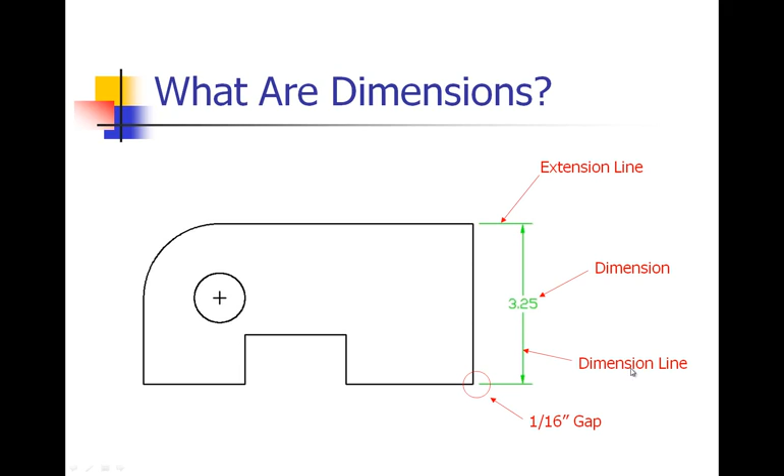So we start out with this little gap. We have extension lines extending beyond our part. We have dimension lines extending beyond our extension lines. And we have our dimension between our dimension lines. So we're going to go through a few of the rules for dimensioning the type of drawings that we're going to be doing throughout this course.

First off, dimension lines must be kept at least 3/8 of an inch from the object and at least 1/4 inch from each other. And this is for aesthetics and readability. You want to make sure this first line of dimensions is far enough away from the part that you can clearly read them and that they are not crowding the part. Additionally, the second tier of dimensions need to be a decent distance away, but not so far that it looks weird. We want this to look aesthetically pleasing, but we also want it to be easy to read.

Now, nobody's actually going to put a ruler on there and measure the distance that you are away from it. You can take a look at it and say, yeah, that looks pretty good, or yeah, something looks a little goofy with that.

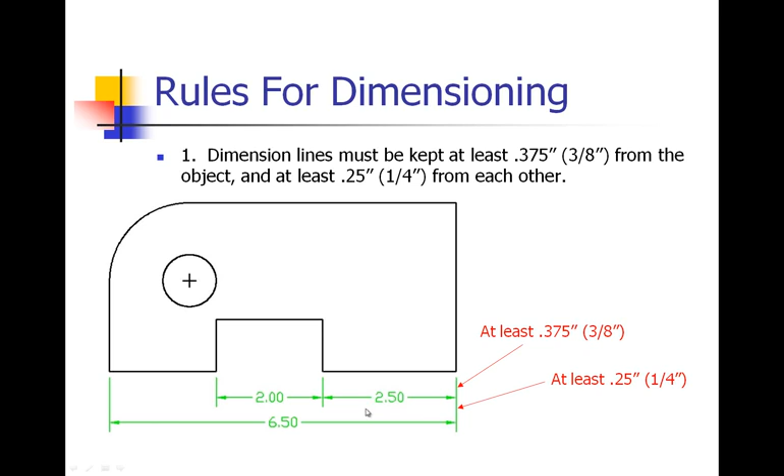Number 2, on machine drawings, which are mechanical type drawings, those are the drawings that we're doing in this course, dimensions should be kept in decimal inches or millimeters if you're working in millimeters. Values are given to the second decimal place, except where greater accuracy is required. If you're doing a drawing that you need to go to the thousandths or ten-thousandths, you need to give that information. For what we do in this class, we are focusing on 2 decimal places. That is accurate enough. So as you can see here, we have a dimension that is in decimal inches, 2.50, and we have 2 places after the decimal.

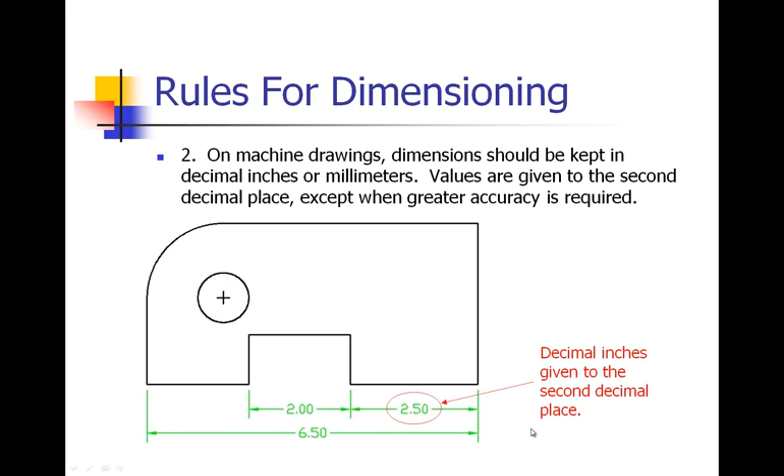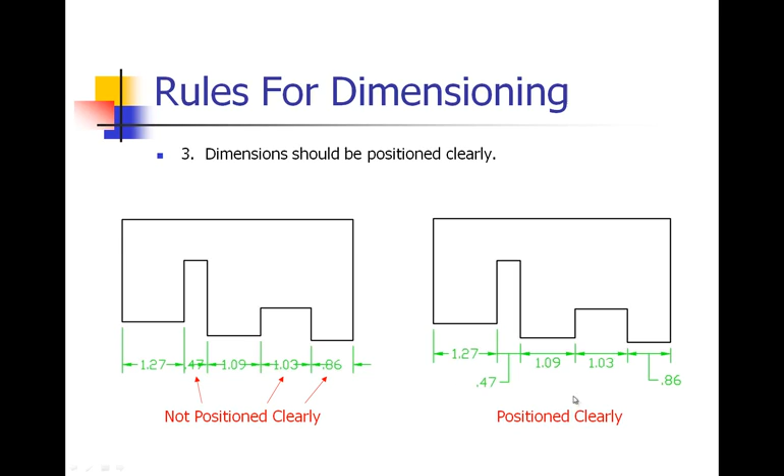Number 3, dimensions should be positioned clearly. If you have a case like this, where we have a lot of dimensions, sometimes the dimension lines will overlap on top of the actual dimensions. What we need to do is modify those dimensions and pull some of those numbers out. So again, it is readable, but it is also aesthetically pleasing. And we'll show you how to do that once we start practicing putting these dimensions on. So they need to be positioned clearly.

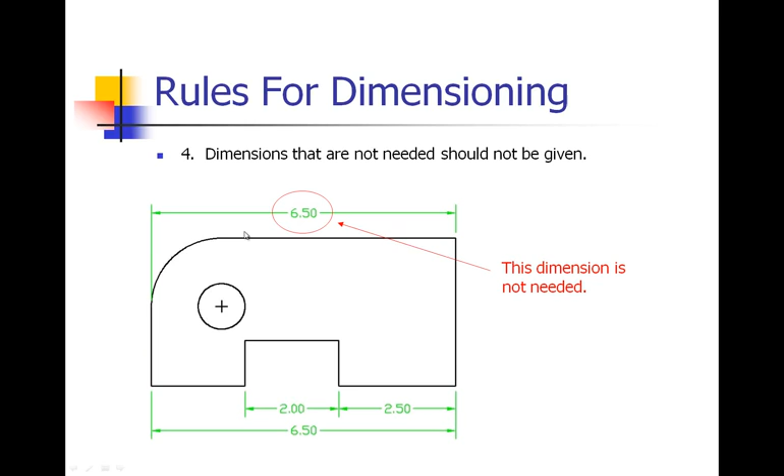Number 4, dimensions that are not needed should not be given. And again, this is for aesthetics and readability. We don't want a whole bunch of dimensions around here that we don't even need, because it crowds the drawing and it makes it look not very good. So with this particular one, 6.50, I already have that measurement down here at the bottom. So I don't need to put that measurement again, because I know that my measurement at the top should be the exact same as the measurement at the bottom.

Now, when you do use the overall dimension, one of the smaller ones should be eliminated. So for this 6.50, we don't need to put all 3 of those smaller dimensions, because we can do just a little bit of math to figure out the last one. So if we took out this 2 inches, we could just take 6.50 and subtract 2.50 and 2 to get the last measurement. Now, that is unless it is needed for a reference, and in that case it should be put in brackets over here.

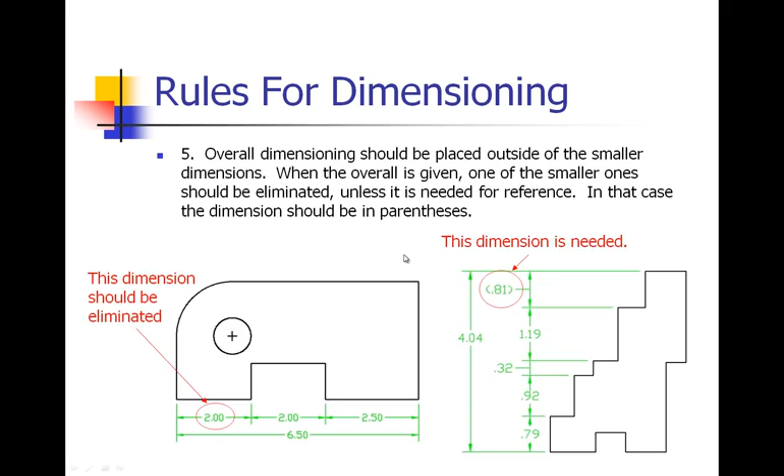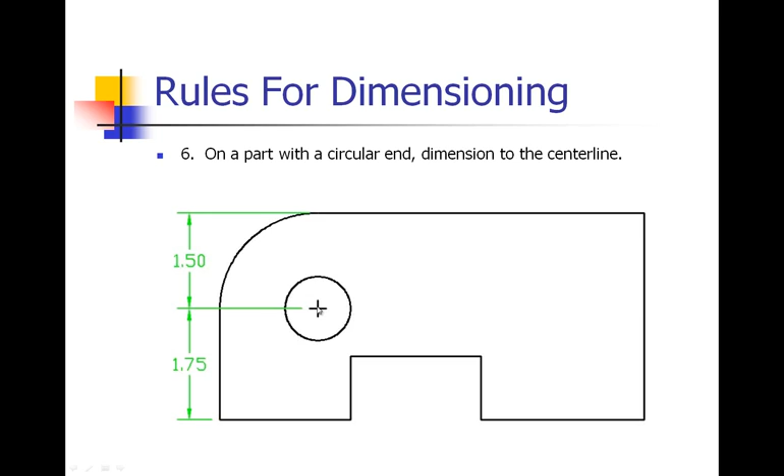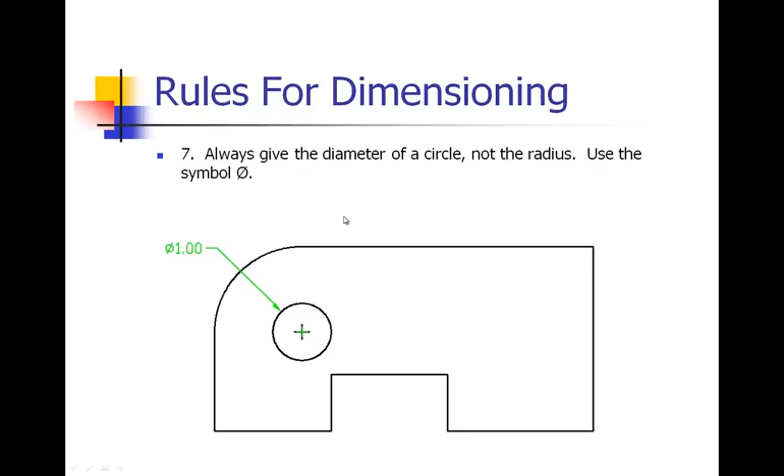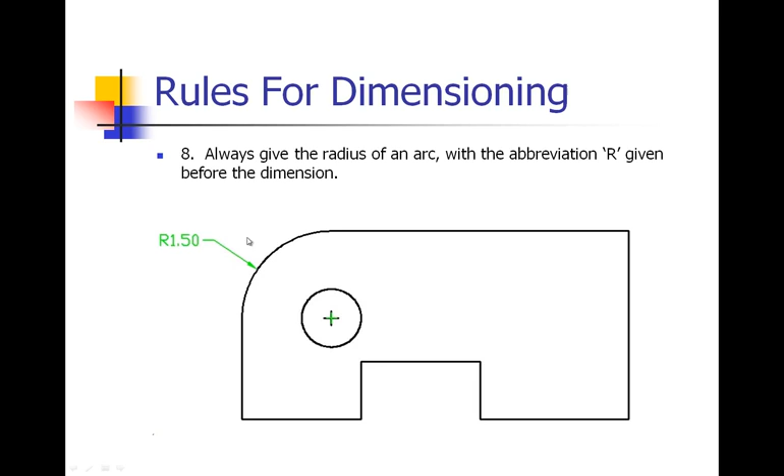Number 8, always give the radius of an arc with the abbreviation R, R standing for radius, given before the dimension. So here we are giving a dimension for this arc, which is not a complete circle. It's a small piece of a circle. Because it is not a full circle, we want to use a radius measurement.

Number 9, don't place diameter dimensions in the shaded area. So if we have a part that has a shaded area, you don't want your dimension to be on top of that area, because then it would be very difficult to read. And again, that is more for aesthetics and readability than anything else.

Now, I don't know what the rest of this part looks like, but it may be better to actually do a diameter measurement coming off of the side of the circle rather than right on top of the circle. It all varies on what the rest of the part looks like. Even with this 45 degrees, we don't want that inside of here on top of this shaded area, because it would be too hard to read.

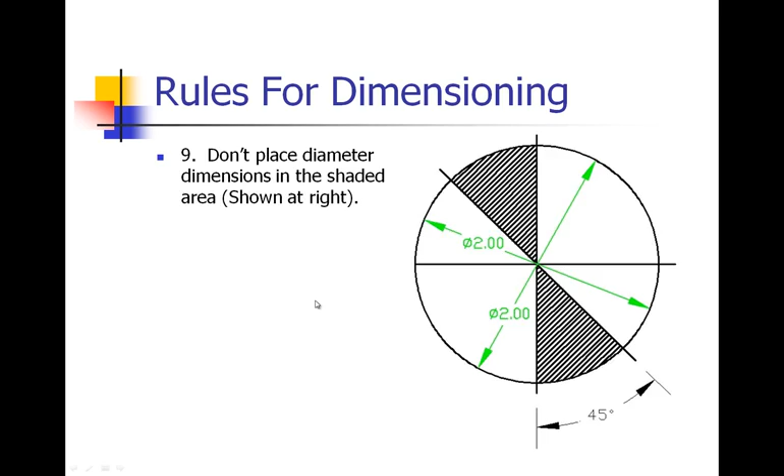Number 10, do not use a center line or a part of an object as a dimension line. So on this particular one, we are using the center line as our dimension line. You don't want to do that. Right down here, we are using an object line as the dimension line, and we don't want to do that because it's not very clear. On this part, it even looks like part of our line is missing.

The correct way to do that would be to pull those measurements outside of our part. So we have a little gap here, a little 1/16 inch gap. We've pulled that measurement outside of our part. It makes it much easier to read.

This one down here, again, we are no longer using the object line. Instead, we've pulled that measurement down, and we have our little gap there. We have our extension lines, our dimension lines, and our dimension. Our dimension is outside of our part. It makes it very easy to read, and it looks very clean.

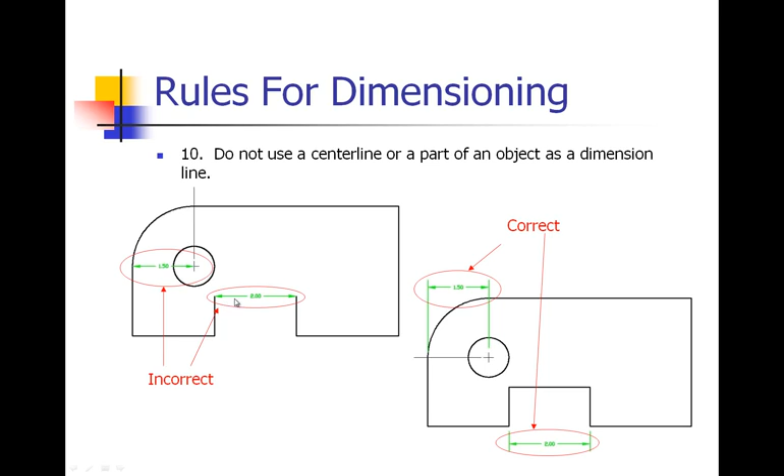Number 11, do not use an object line as an extension line. Now I'm going to jump back to number 10. This one was talking about using object lines as dimension lines. Now if you recall, a dimension line is the line with the arrowhead. Number 11, we're talking about not using the object line as an extension line. The extension lines were the little lines extending out beyond our object.

So we have here this arrowhead is pointing to an object line rather than an extension line. We would want to pull that dimension probably off to the left of our drawing and have this outside of the part and have an extension line on each side.

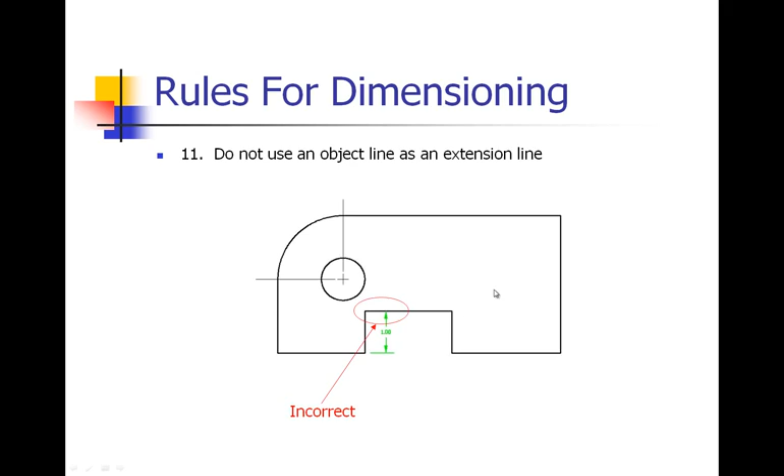Now as we progress with these future drawings, we're going to be able to utilize these rules for dimensioning and get a little bit of practice to help us dimension these correctly and make our drawings a little bit more complete than the previous ones that we've done.